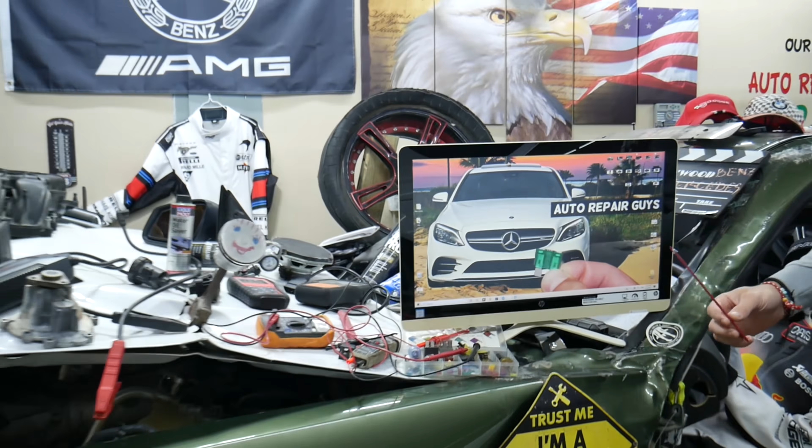Hey guys, welcome back to Auto Repair Guys. Super quick, very helpful video for any of you trying to find where the MAF sensor, also known as mass airflow sensor, fuses and relays are located on Mercedes C-Class generation W205.

Guys, if you have a bad MAF sensor, do not buy one until you check these fuses because it could be a simple fix. We'll also talk about hidden fuse box information that can potentially save you thousands of dollars in future repairs.

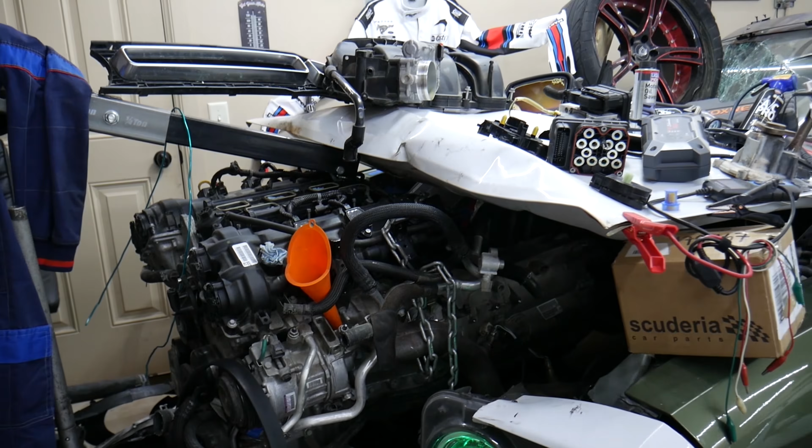So let's go ahead and start on it now.

So guys, for the MAF sensor, before we start, let me tell you, for any of you that doesn't know how to test the MAF sensor, we have a video that will explain how to test it. Always test them, do not waste your money on a part that you may not need guys. The video will be on our channel, how to test the MAF sensor.

Come here, we'll show you something now.

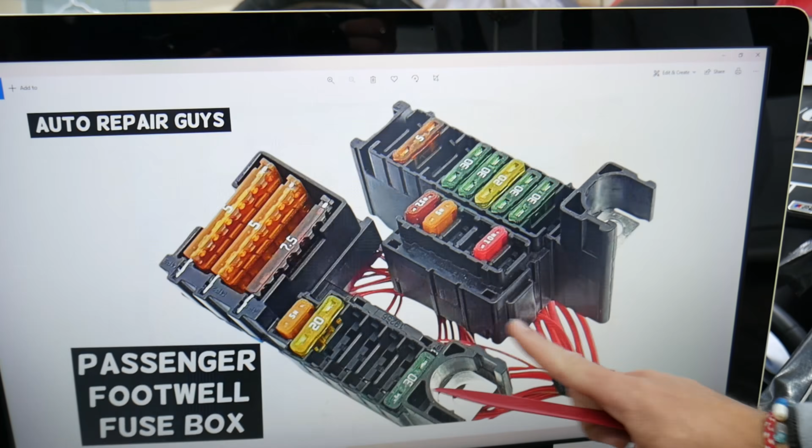The first fuse that we need to start checking guys, we need to come to the passenger side, open the passenger door, come in the footwell compartment right here. I want to show you - it will be right here on that plastic trim. Here you have a cover, you open that cover and underneath you're going to find a fuse box with a layout like this one here.

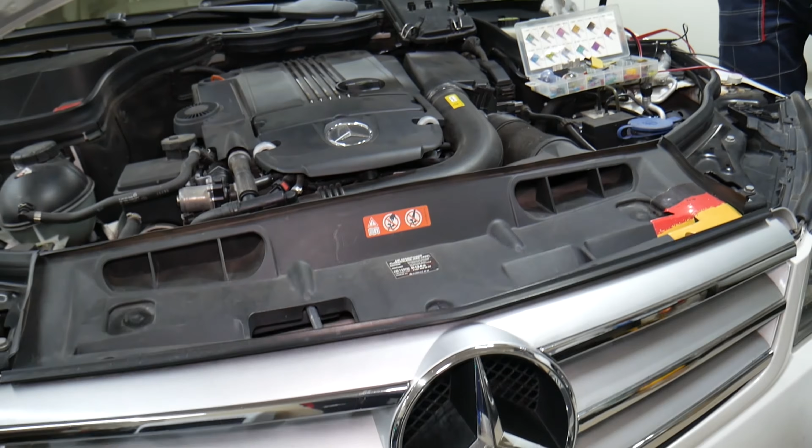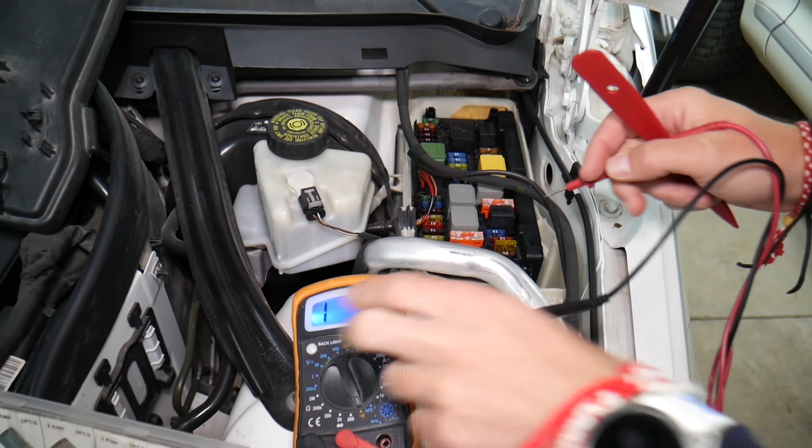Before we continue, let's explain quickly why it's always a good idea to test fuses and relays. People make one common mistake - they never test fuses and relays, they just look at them and assume they're good. At that point, they think they have a good fuse or relay and they start replacing modules, computers, parts that can cost you thousands of dollars in repairs guys. Always test your fuses. You have no idea how many cars we fixed for customers that said, oh, I checked the fuse, everything's fine, but I still have a problem.

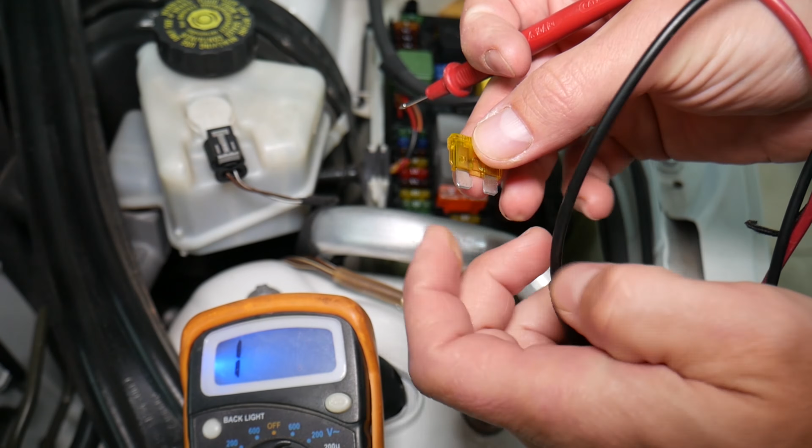Now, some fuses are super hard to see if they're burnt or not. Some of them will be really easily accessible, you can clearly see them, but there will be fuses that are not see-through, that may look like they're not burned, but they're actually burned. Often, guys, you can actually test these fuses without even removing them. It's very important to know how to test different fuses and relays, and if you want to see how to do that guys, we're going to put a link to a video in the description below on how to test a fuse and how to test a relay. Always check that.

I can't emphasize that enough because it could be a really simple fix. Here specifically we will need to check multiple fuses. These fuses now work in multiple fuse boxes for engine management. Which exactly it's for that sensor is hard to tell, but check all of them, okay, and there will be some hidden ones because it could be any of these.

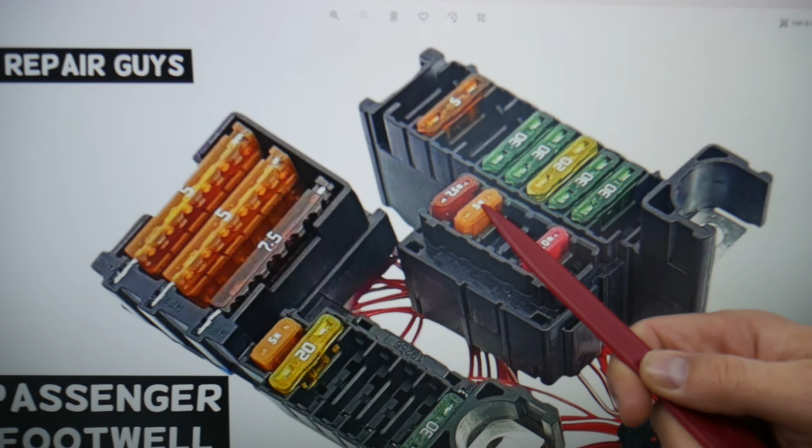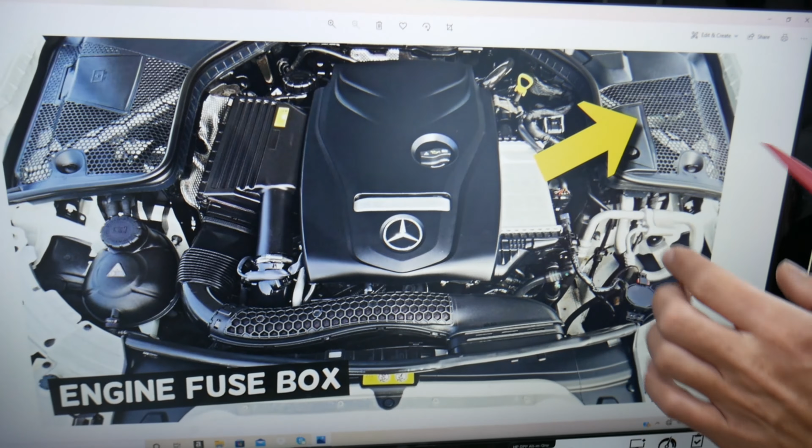The first fuse that we need to check here is known as fuse number 315, that fuse right here is that 5A fuse. Next, we need to open the hood. Under the hood, that's the main engine fuse box, right here under that cover. So you can see the fuse box right here, let me show you. It's a white box with a black cover.

Here you have a turning knob, turn it 90 degrees counterclockwise, one on the back side. Open that cover. Underneath you will need to remove the black fuse box cover by unscrewing two bolts with Torx 22, and when you open it, it looks like this one.

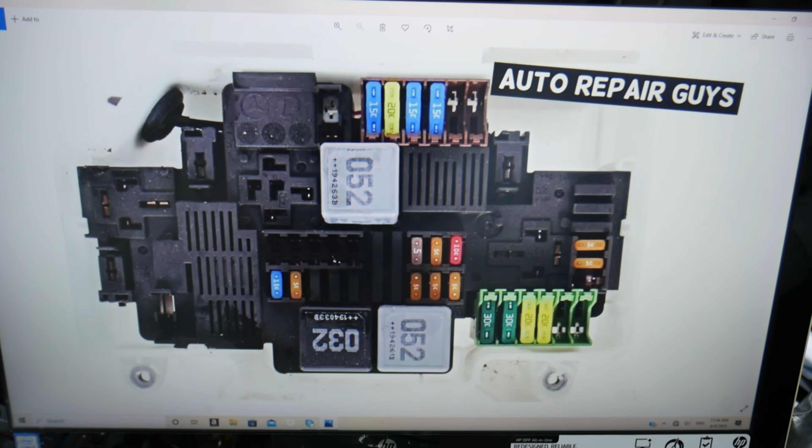Here specifically we need to check a few more fuses. Some of you may have a fuse known as fuse 122 right here. If you have it, check it, depending on the model and year you may not. Fuse 126 is a very important fuse right there that you will need to check.

Then we need to check relay G right here, relay G. And here under that cover you have three relays, that's relay O, J and L. Relay J right here, it's a little bit white, you can see it under the cover, you need to check that too.

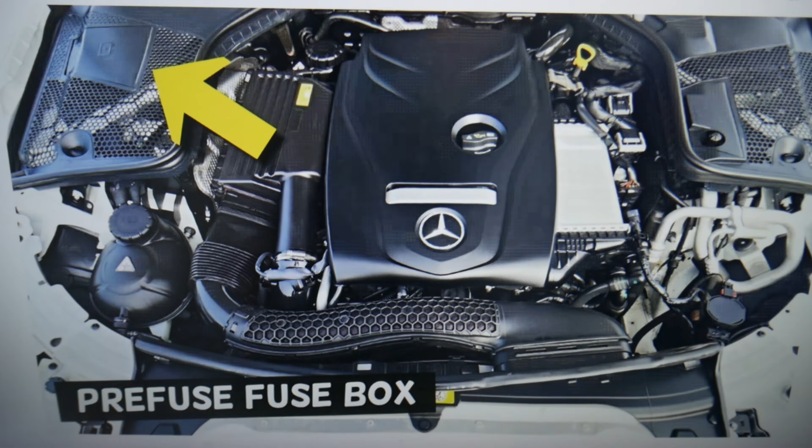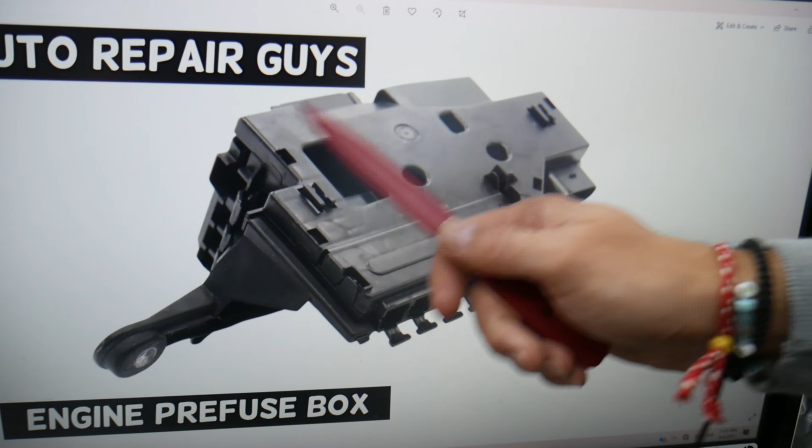Now we will still be working under the hood, but at a different location. Coming to the passenger side now, you see under that cover here that has the battery symbol. If you open it, that's your positive jump starter terminal. But if you look on the back side of that box, it's actually a pre-fuse box.

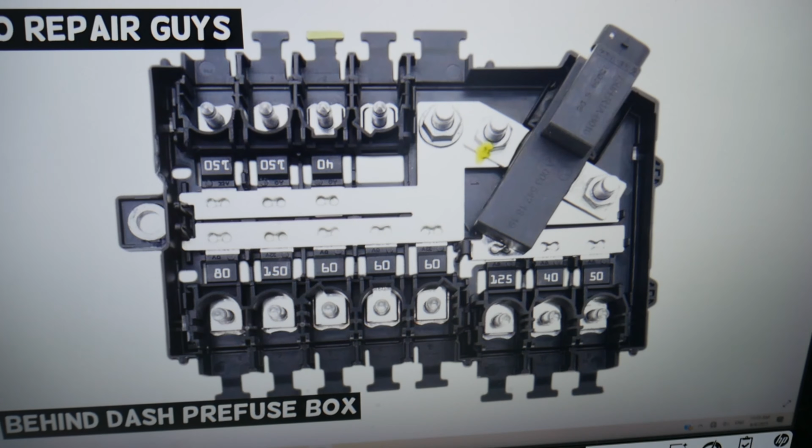When you open that box, I want to show you what it's going to look like. It will look something similar to this one. It will have multiple fuses built in it. Depending on the year and model, you may have all of them or some of them. Let me show you now what we will need to check here specifically. If you have that kind of fuse box, you may have two different kinds here.

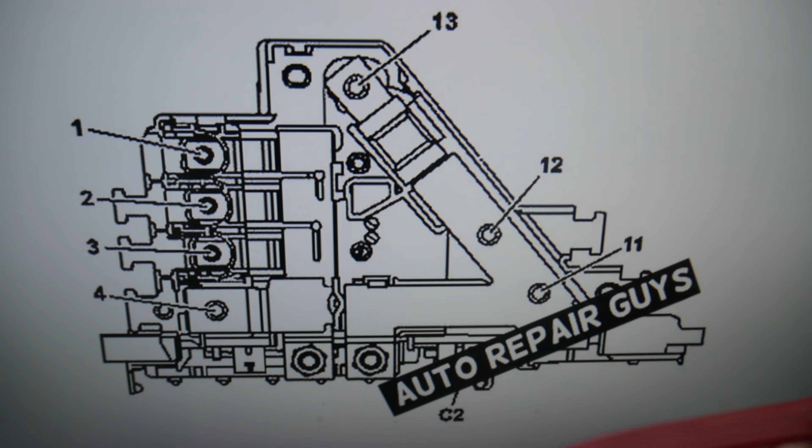We're talking first about fuse number 12 that you need to check right here, and you need to check fuse number 3, which is that fuse right there. But test all of them here as well, because those are super important fuses. If you have this kind of fuse box, you will need to check fuse number 5 right there.

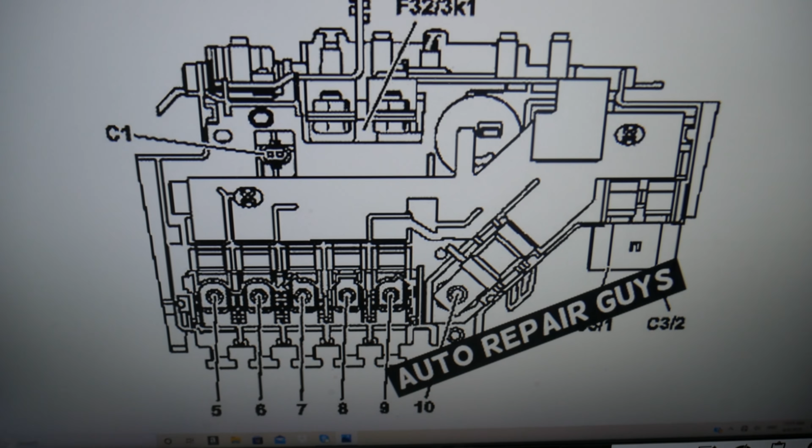Check that fuse. Then we need to come to the trunk. Open the trunk, lift the carpet liner up. In the right corner here, you have another black carpet that's cut out. Lift the flap, and underneath you have a fuse box for the trunk management system here.

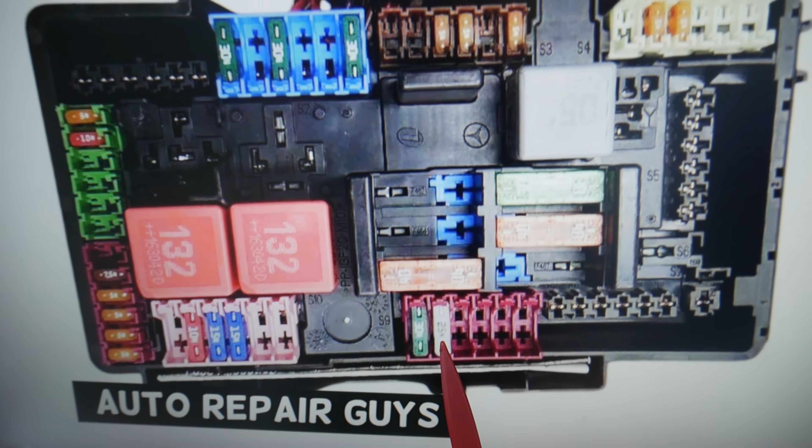That's the rear SAM module, and here we need to check specifically fuse 400 and 442, that one right here, very important fuse. And you need to check fuse number 451, that 5 amp fuse.

Now those are the main things that we usually check. Another thing, always test these sensors. We'll have videos on the channel how to do it as well, step by step.

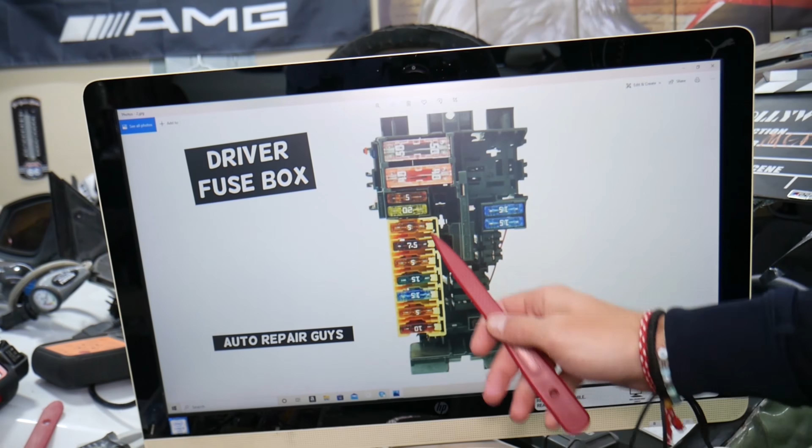Quick advice: that generation Mercedes has all kinds of different fuses and relays. I want to show you some of them. Those are super special ones as well, and those pre-fuse boxes as well. Check it out, you will have a great variety of fuses and relays.